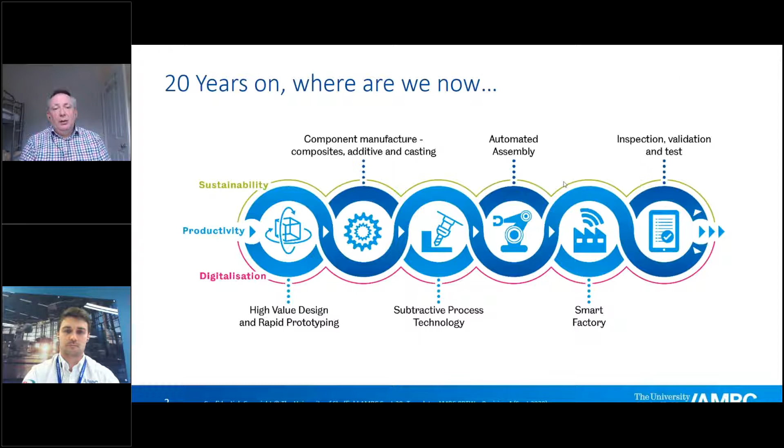Now, if we move on to the next slide, then what we can actually see is that productivity is all about doing more with less. It's improving productivity by improving quality, removing rework, getting things right first time. And we do that through the adoption of digital technologies.

Yesterday, if you listened to Juergen Maier, the author and the leader of the Made Smarter program and the producer of the Made Smarter review in 2017, digitalization is here. You cannot ignore that. But if we embrace it, then we will really improve the productivity in the UK through the adoption of industrial digitalization technologies.

And if you'd come to the AMRC stand at MACH in 2018, you would have seen a number of those IDTs. You would have seen additive manufacturing components. You would have seen augmented reality and virtual reality, the use of machine learning and artificial intelligence to improve the decision-making of the manufacturing process.

And all of these technologies are really driving the sustainability agenda. Digitalization is an enabler to improve productivity and to improve sustainability. But sustainability isn't just about being green. There's a huge drive towards net zero and environmental sustainability, but there are other aspects of sustainability as well.

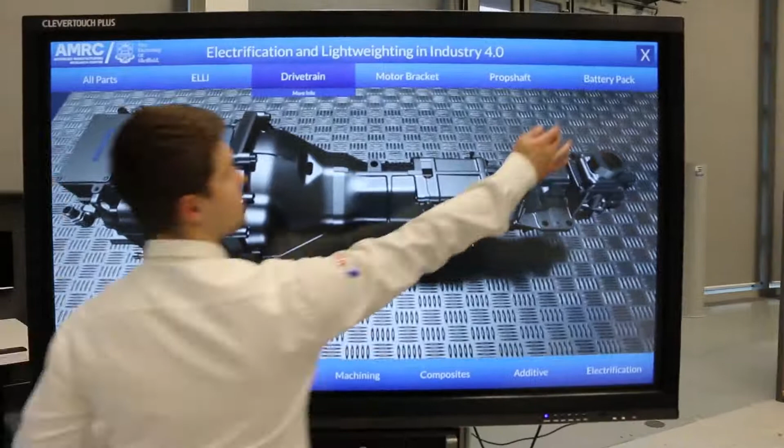So each demonstration I'm going to walk you through today isn't intrinsically linked to each other. However, they are interlinked via the main central product, which in this case is Project ELLI, and the digital twin. Now, the benefit to using a digital twin in this sort of setup and scenario is it allows us to process monitor each of those demonstrations and the individual bits of information that are coming out of them.

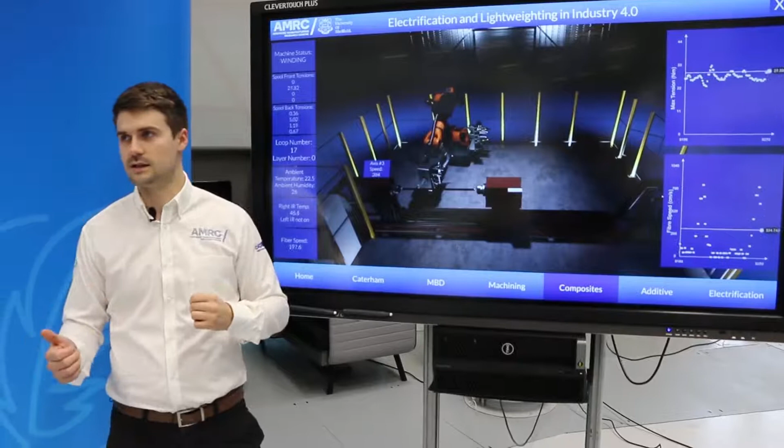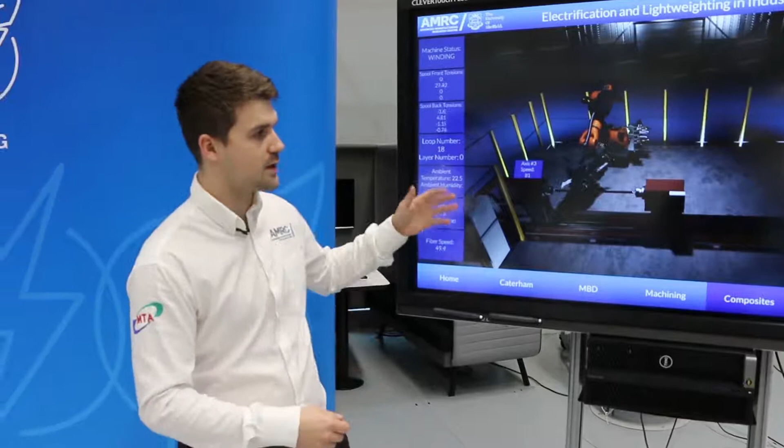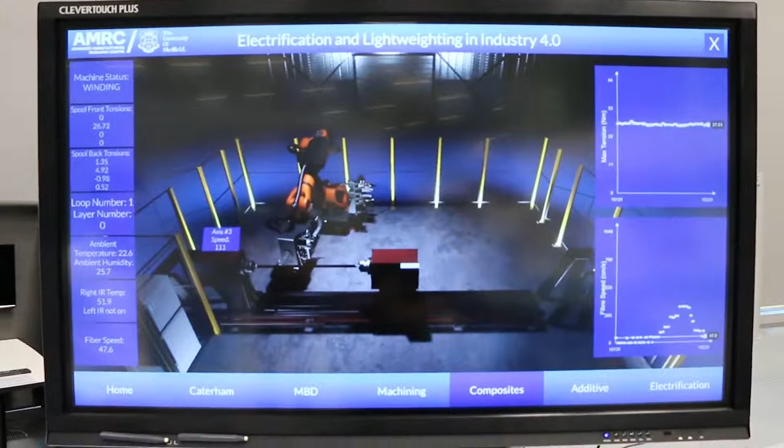So for instance, on the composites demonstration that we've got, this is the robotic filament winder, which is sat over in our Advanced Composites Centre. I can't show you that in physical form today because it's too large for us to actually have here. But this is effectively mirroring what is happening back in that facility. By capturing the data of the filament wind - the tension, the angle, and the speed of the fibre winding - it allows us to understand how well that process is being performed. It allows us to learn from that data, and by learning from that data, we are then able to implement strategies to improve the manufacturing processes that we've got.

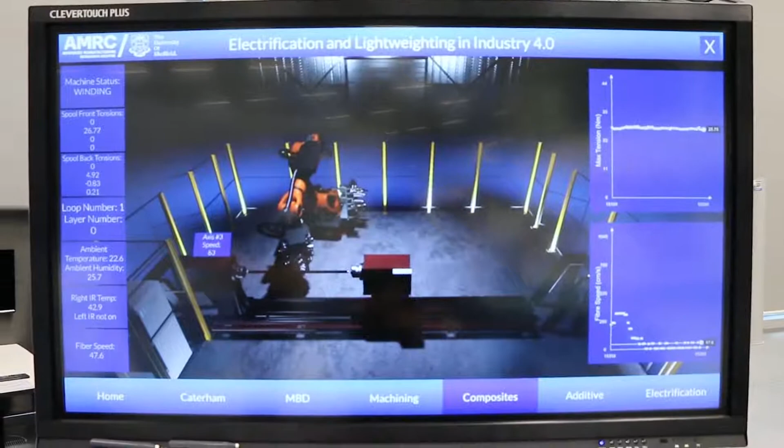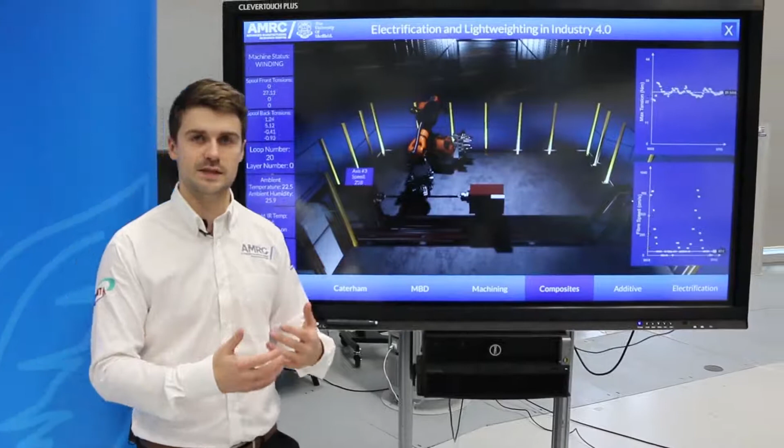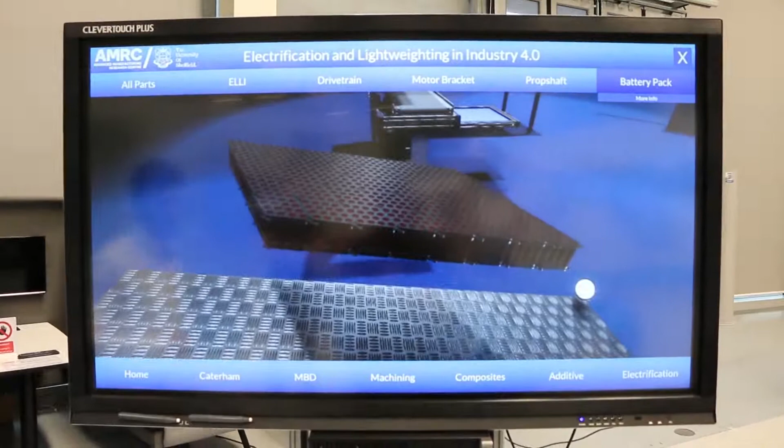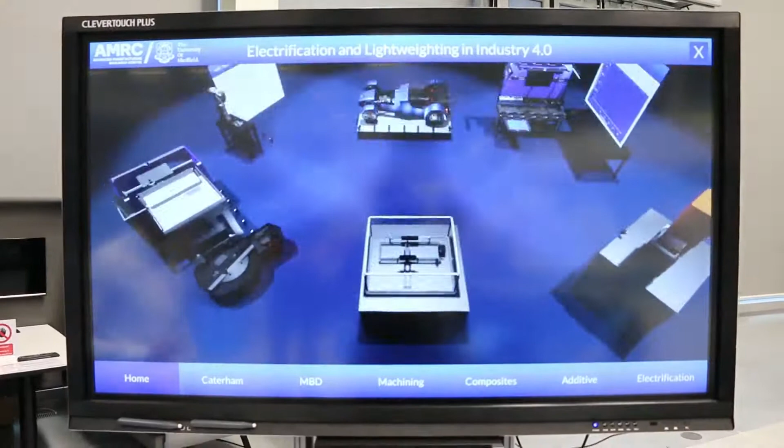By improving those manufacturing processes that we've got, we want to lean back into the sustainability piece for Project ELLI, which is what we're all focusing on here. Following up these Industry 4 technologies and using that process data to improve the way we work allows us to hone down on the best manufacturing processes for each product we output. In the case of ELLI, where we've been working on a carbon fibre wound shaft, we're able to improve the process speed, improve the process quality, and reduce the carbon offset of that process through a reduction in the amount of time it takes to perform.

To follow on from that sustainability aspect, we've got other aspects of digital information being fed through. For example, on the MBD demonstration, which I'll show you later, we're using that to track and monitor the measurement profiles on the robotic program as it runs through its inspection process. Using that inspection process data, we're able to monitor how that inspection process is performing offline, which means that as effectively a maintenance team in this scenario, we can track and understand how each component that's been inspected is running through. We can then begin to see tracks and trends in the way we're running these operations, which allows us to improve on those processes again and hone down on where some of these defects may be.

I think the key thing to touch on is Industry 4 is an enabling tool. Having that level of process data allows us to look at aspects like machine learning and AI to improve these processes on the fly. We can go into digital twins at great depth, but I don't think it's worth spending a lot of time deep diving into the aspects of digital twin at this stage.

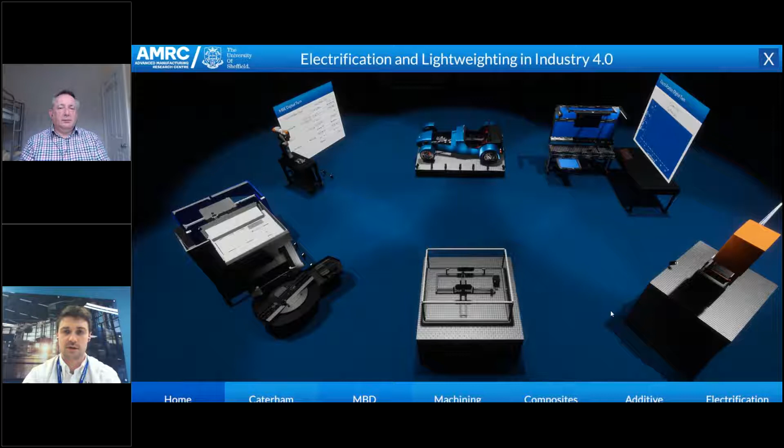However, it doesn't need to be as glossy and as visually representative as we see here. The key thing is understanding that process information coming out of the manufacturing processes and using it in the most effective way. So the first thing I'll take you through next is the electrification side of it. Here we're looking at an intelligent workbench assembly, and we're looking at battery pack assembly. So if we open up video 2.

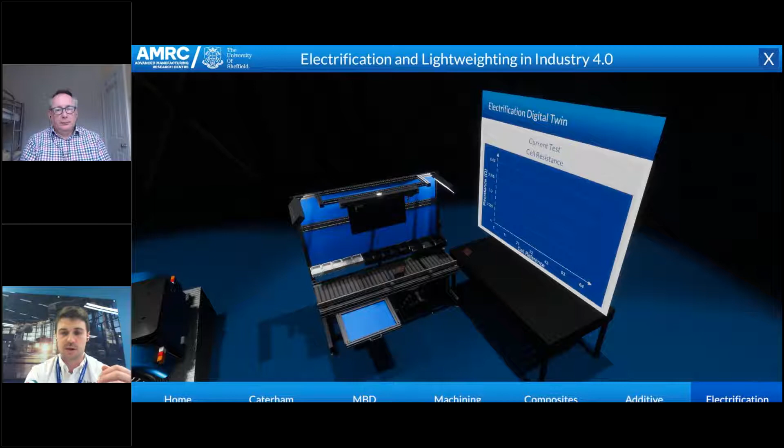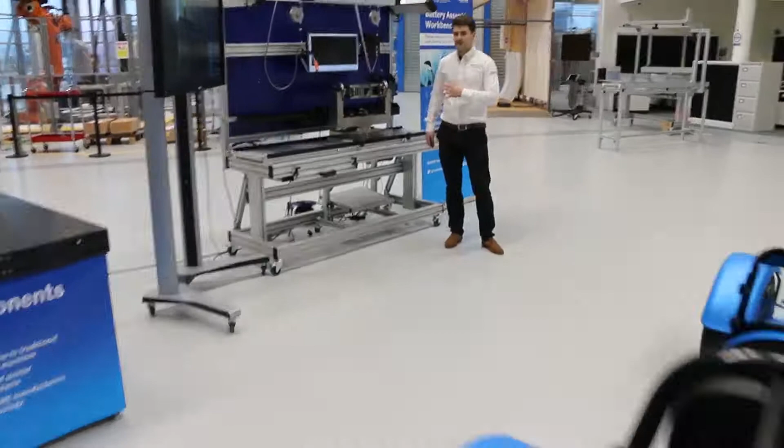So this is our intelligent battery assembly workbench. This was developed by our remote facility over in Preston. The engineers we have working in Preston are effectively a satellite site, an extension of the work we do here at Factory 2050. However, they have a distinct focus on battery cell and battery pack manufacture and assembly processes.

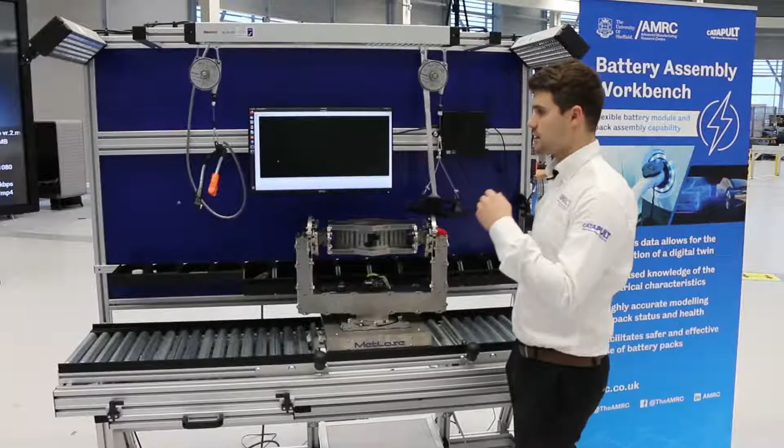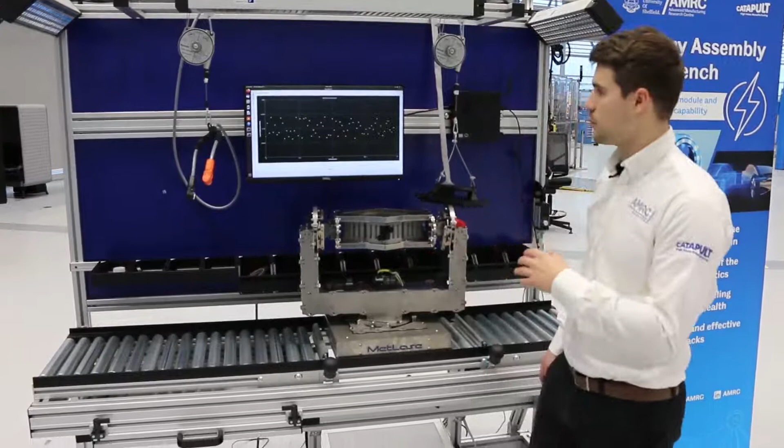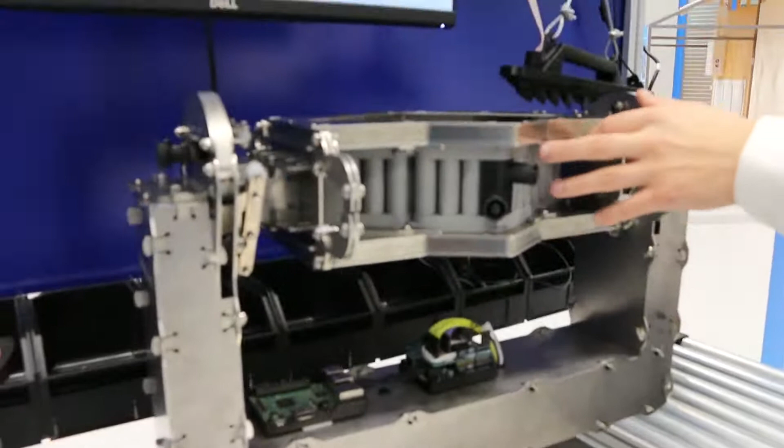The idea behind this workbench station is it offers us a digital passport for battery packs as they are assembled. The key thing when assembling battery packs is health and safety. The first thing to note when looking at this is it's a demonstration setup, so all of these battery cells we see here are dummy replicas. We didn't feel it would be safe to do this, not in a controlled laboratory environment, to have live lithium-ion cell batteries.

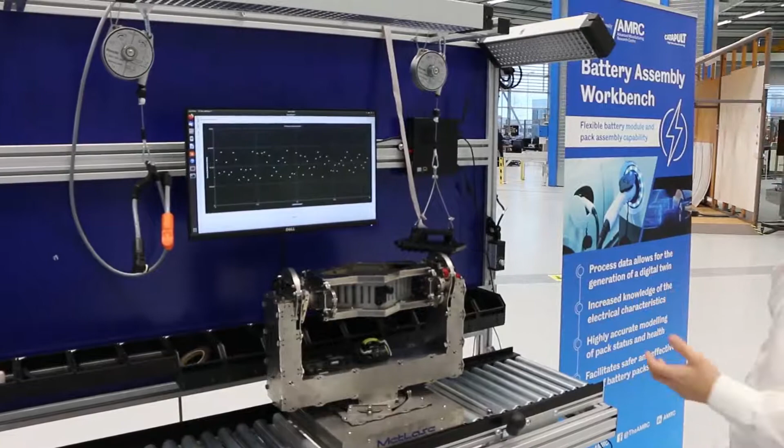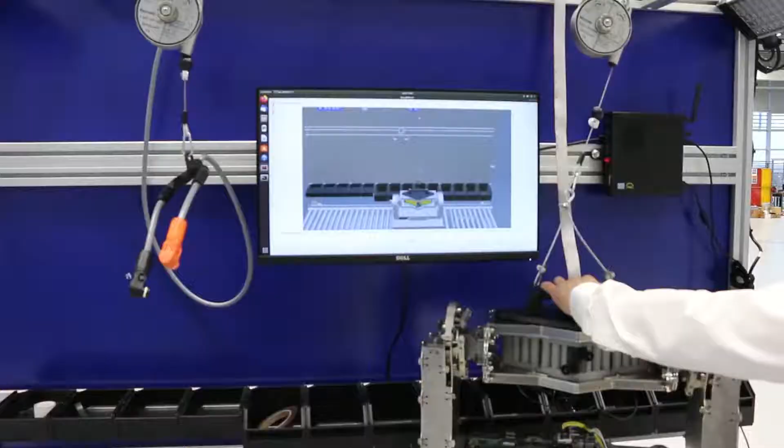One of the key things to note when building these battery packs is the measure of the charge between parallel poles. One of the key things to that is the monitoring and understanding of the power that each of these cells is producing and what that means as an entire pack. The workbench assembly we have set up here, and its identical sister in the facility over in Preston, is effectively a digital twin representation that guides an operator through the various steps of the processes. If we cycle through, the operator is guided through the various assembly processes and test procedures, allowing them to understand how the battery packs go together to form a module assembly at the end, and track the data as it's tested through.

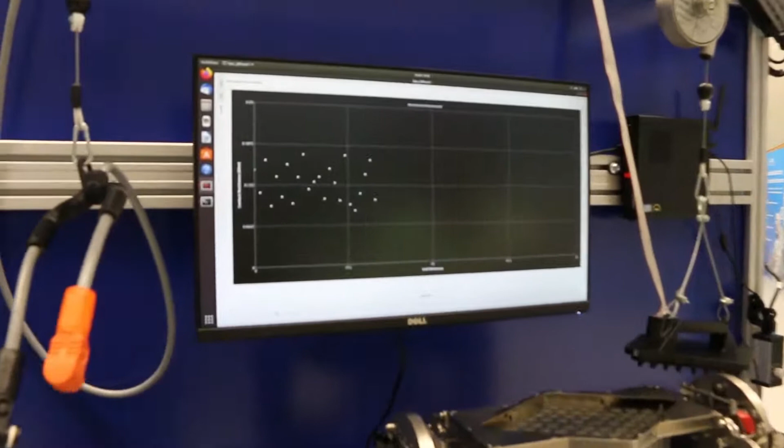For instance, we've got contact resistance across the board. The idea of what we're trying to hit here is 0.125 ohms over their entire polarity. That means we've got a consistent module, which means we shouldn't be experiencing any spikes. Now, where this ties back in is into our main digital twin, which I introduced you to earlier. That digital twin and the data we produce here are able to be interlinked, allowing us to track each of these packs as they go through, so that we're able to build up that trend of these modules being assembled over time.

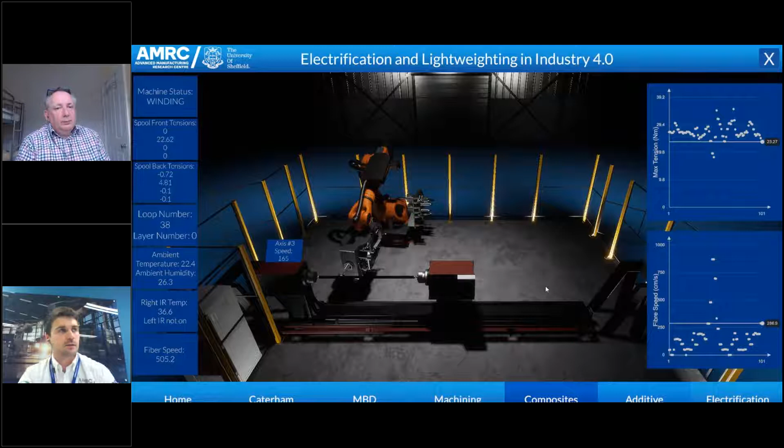Looking back at the electrification side of it, the key thing the guys in Northwest are working on is ensuring safety through assembly. One of the biggest problems we currently have in battery cell manufacturing is non-consistent components coming through. It's critical for battery packs to be assembled as consistently as possible. But we can touch on that later.

The next thing we want to look at is the lightweighting elements piece. We've got a couple of videos here covering composite winding and the additive manufacturing and machining processes. The first is the digital twin I showed you earlier of the composite filament winder. Next is the desktop X-Winder video.

This is our desktop X-Winder. It's a very low cost filament winding solution. What we're trying to show is that lightweighting and sustainability doesn't have to cost the earth.

Traditional filament winding machines and processes tend to cost hundreds of thousands of pounds, making it a very difficult market for most companies and SMEs throughout the UK to get into. That's why historic research and work on composite winding and lightweighting has normally only been applicable to tier 1s and OEMs. This is where we're looking to get it out into a much wider market.

One of the biggest technical challenges we face is ensuring that a lot of the kit is low cost enough and accessible to the majority of the UK manufacturing sector. The X-Winder does that.

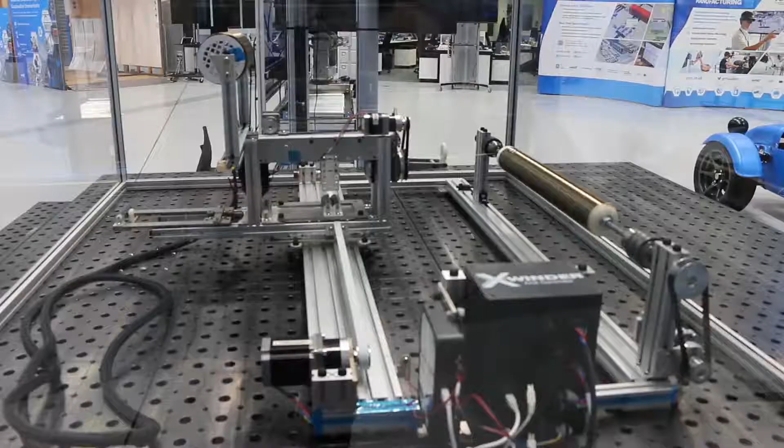This is an off-the-shelf kit. It costs about $3,000 and it's able to wind tubes that historically could only be done by very expensive bespoke machine tools. You can tell it's a bit low cost through some of the design artifacts on it - it's been made with aluminium profile solutions, a plastic mandrel, and some very low cost components. But the idea is it opens up a gateway for small and medium enterprises to get into this aspect of manufacturing.

Being able to manufacture lightweight carbon fibre components is something I personally view as critical for SMEs getting into the markets moving forward.

The great thing about this is it's set up using G-code, one of the first CNC programming codes, so almost anybody would be able to program and use it. It's very simple and straightforward. The idea is that historically, SMEs who would normally die away towards the end of industrial changes are able to keep going through the adoption of technologies like this.

Just to jump in there, I think the last two segments have really emphasized the sustainability agenda with the workbench. What we have the ability to do there is upskill people rapidly while maintaining quality, and through that we improve productivity and the traceability of components through the production cycle. If you listened to the presentation by Dave Holmes of BAE Systems yesterday, you'll see these technologies are starting to appear on shop floors.

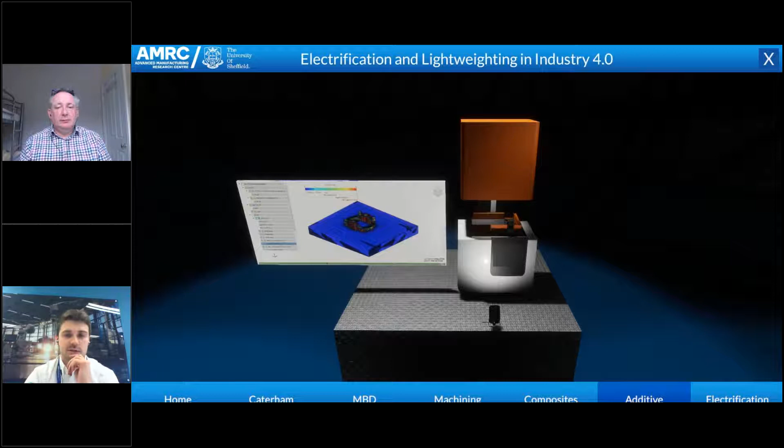This is the capture of the digital twin of the additive manufacturing, and I'm going to show you the next video, which will take us through some of the additive processes.

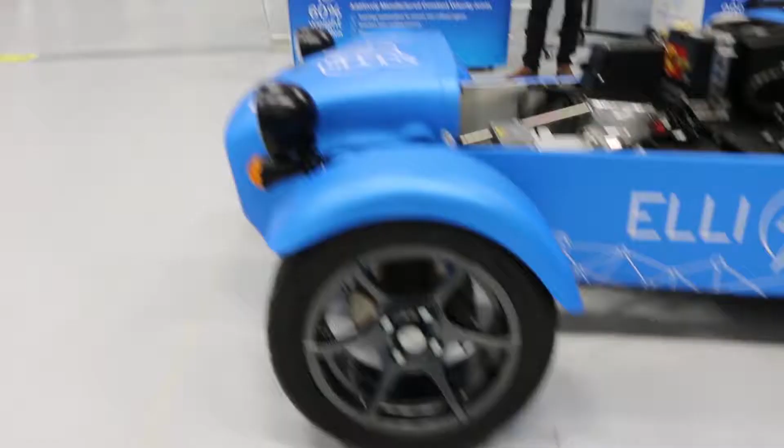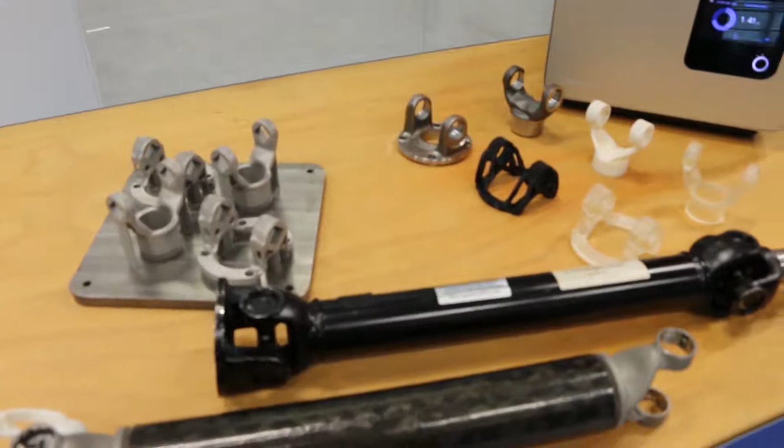Here we have our topology optimized additive manufactured components. As part of the lightweighting philosophy we've approached with ELLI, we've been looking at various routes through lightweighting of traditionally manufactured components.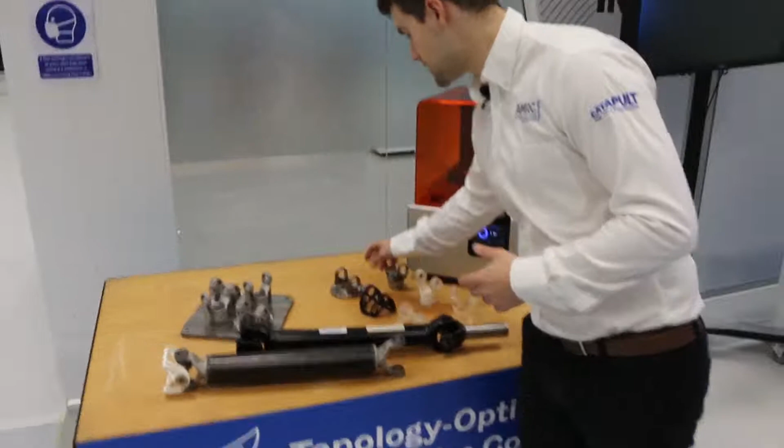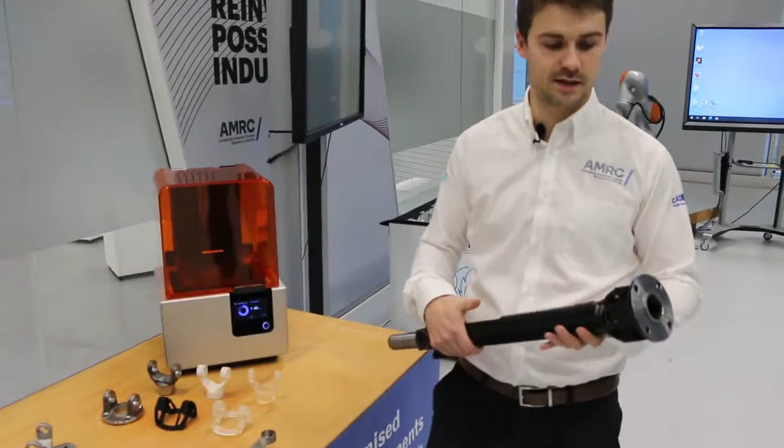Now, the idea of looking at these on an individual basis was we wanted to focus on the original prop shaft of ELLI. Now this, as a component off the Caterham, weighs 5.2 kilograms and is steel, welded to cast and machined yoke components, and this is where we saw one of the biggest potential opportunities.

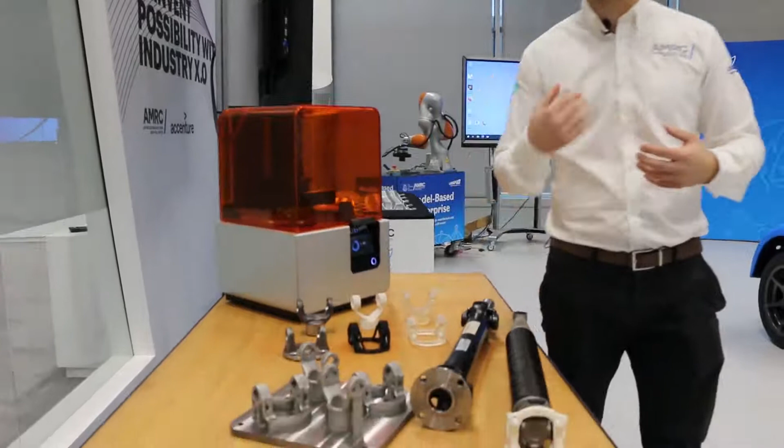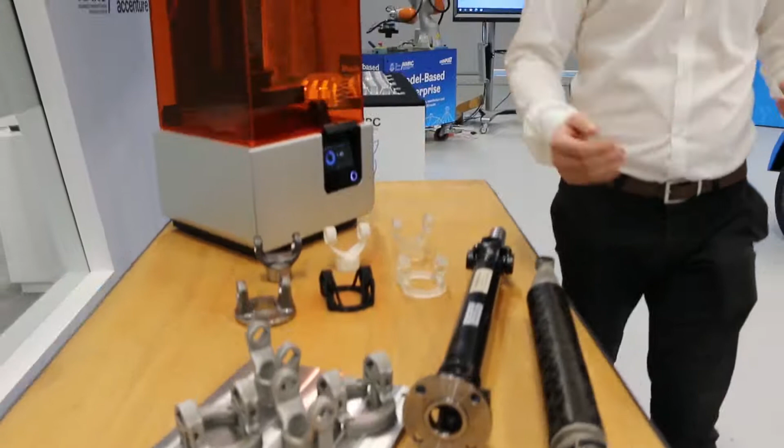This is an inertial component, which means it's a rotating mass on the vehicle. Now, to my mind, on an engineering level, when I want to talk about mass reduction, if I can get mass reduction on an inertia component, I can save much more overall in terms of efficiency than I could do normally through just lightweighting in general. And that's where we've come down this route.

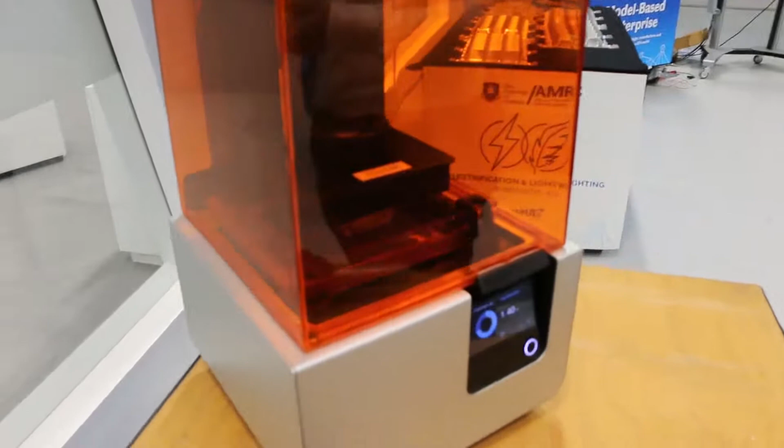So as a sort of philosophy, additive manufacturing tends to start with polymer. So what you can see on the Formlabs 3D printer behind me is effectively 3D printing these components. The idea behind using 3D printing polymer is it allows us to prototype components before we proceed to full manufacture, which means we can effectively understand how these components are going to behave when they're printed, and how they're going to behave when they are being post-process machined.

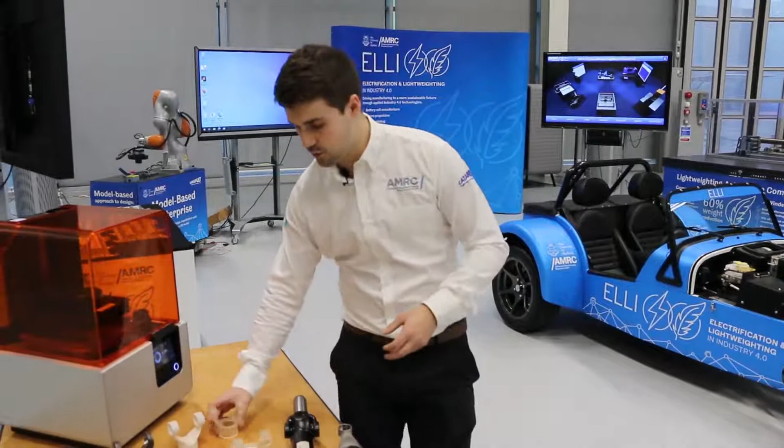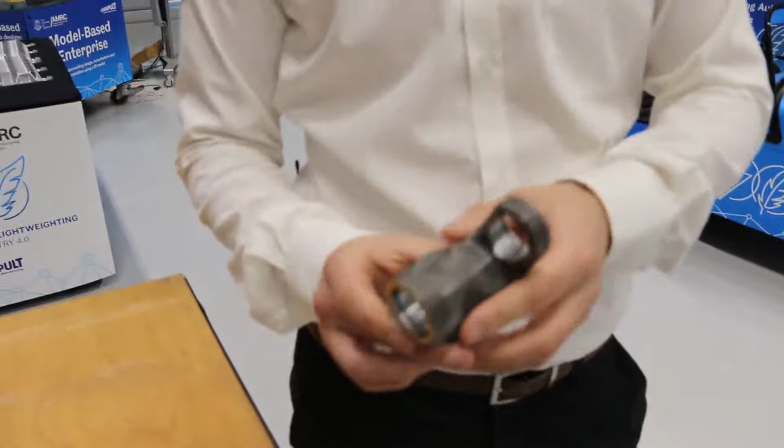But the real starting block with it is the traditional component. So we start with a cast component. This is machined to specification. We then run it through some generative design optimisation.

So here we're looking at printing in titanium as opposed to steel. This gives us a strength and weight benefit, because it means that we're able to reduce the amount of material that's in it. Now, getting that maximum material utilisation is one of the core aspects of sustainability for us.

Now, what we end up with are these titanium components that we can see here. The additive manufacturing process isn't in itself the most sustainable process in the world, and that's one of the key things we need to work on: how do we get sustainable manufacturing through the implementation of technology which at its core isn't actually that sustainable. We're trying to promote different aspects of sustainability within that.

So we've got our three core principles of economic sustainability, social sustainability and environmental sustainability. Through using processes like additive manufacturing, we can look to gain improvements on each of those in various ways.

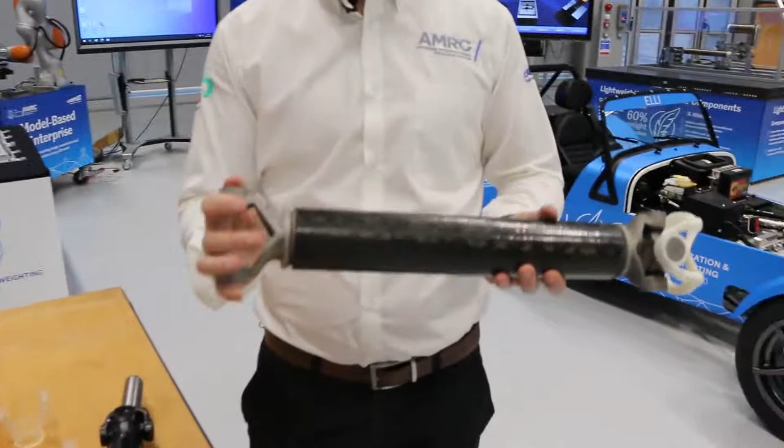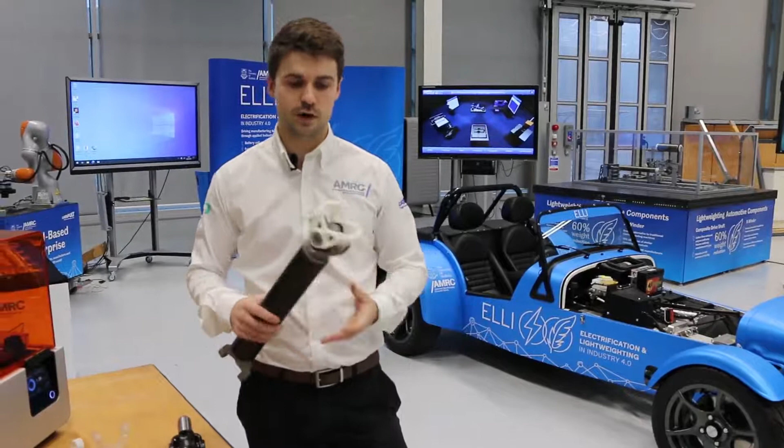Now, the outcome of that was the carbon fibre and topology optimised prop shaft. This was effectively built by the additive manufacturing team and the composite filament winding team, which I showed you, so on the low-cost filament winder. What we end up with is a component that has a total mass of 1.7 kilograms at the end, and that's around a 60% total mass saving.

But to go back to what I mentioned at the start, if we've got that on an inertial component, what we're actually saying is we require 60% less energy to spin that component through the driveline.

Now, if we're talking about going into electric machines manufacturing, the key thing that stops an electric machine being 100% efficient is the mass of the driveline components that it has to spin. So the lighter we can get these, the more efficient we can have a motor.

Then through implementing these technologies in manufacturing processes, we can hope to improve the efficiency of those baseline manufacturing processes, which means that in the long run, if we can develop CNC machines which have these sorts of components internal to them - lightweight gear sets, lightweight rotating components - we can actually have a much more sustainable machining process. So traditional machining processes like these on a cast component, we would actually be able to improve the efficiency of this as a process overall.

I think the key thing to take away from that is it's about the application of the technology again. So when we talk about using additive manufacturing in other processes such as subtractive machining, what we're talking about is, can we look through the initial manufacture of those CNC machines to improve, say, the gear sets or the rotating components within that, so that we can effectively have a much more efficient overall machine, which can then in turn lead to a reduction in the cost and the energy usage that it requires to perform a traditional process.

So the next thing I'd like to have a look at is the machining processes. This is the digital twin of our Full Monty machine tool. You might have seen this or heard of it before. It's effectively a retrofitted Cincinnati H5 machine tool with a series of sensors on it.

This was a sort of showcase as to how we could break some of the barriers of Industry 4 going forward, with a more legacy machine that was as capable of running as a brand new machine tool would still be. And the video that we're going to show you is about some lightweight aerostructure components. So if we can look at the next video.

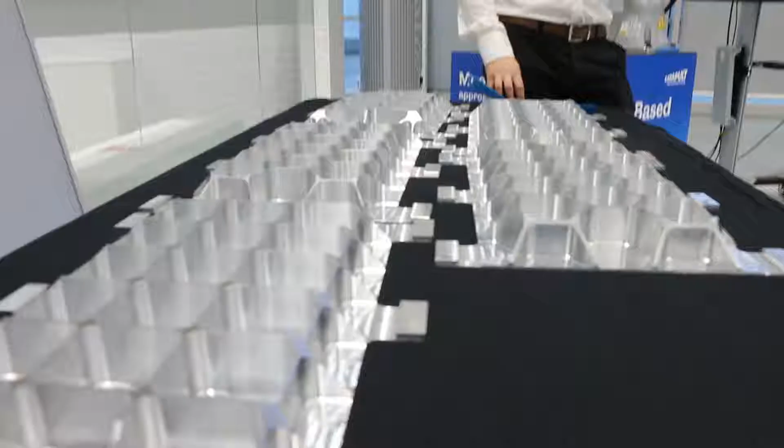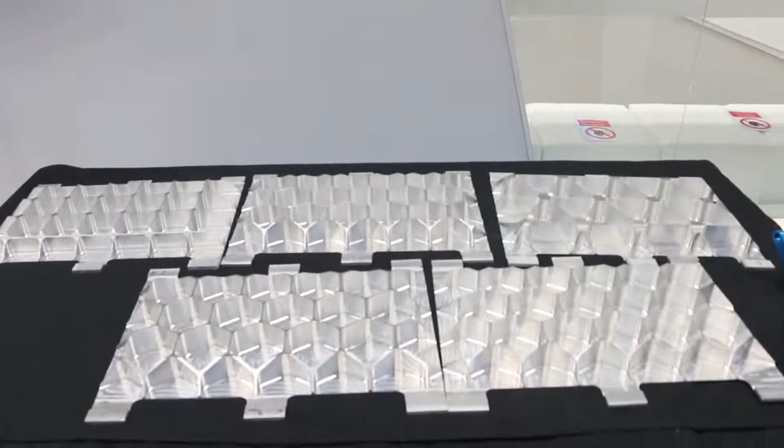This is our advanced lightweight machining demonstration, focused around aerostructures and nested pockets of machining process. Now, this is more of a machining strategy as opposed to something directly applicable to the main product, but it ties in massively to the lightweighting aspect.

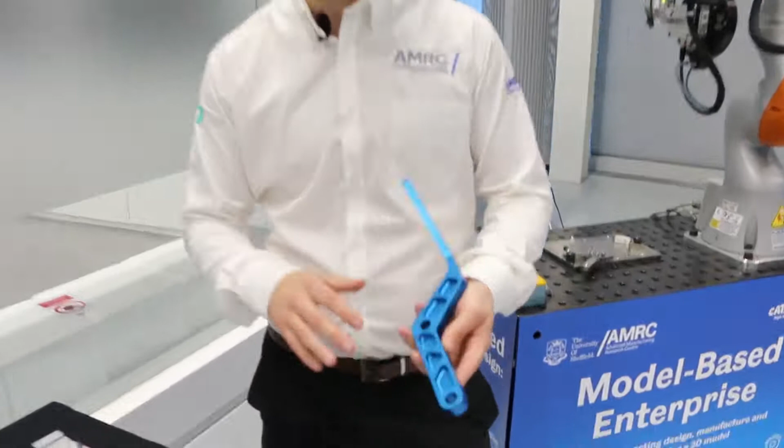We have attempted to apply some of the learnings from that on the motor bracket that we inspected on the model-based enterprise demonstration. However, we haven't been able to go as far as we were with the aerostructure components, which I'll give you more information about. That is in our long-term plan.

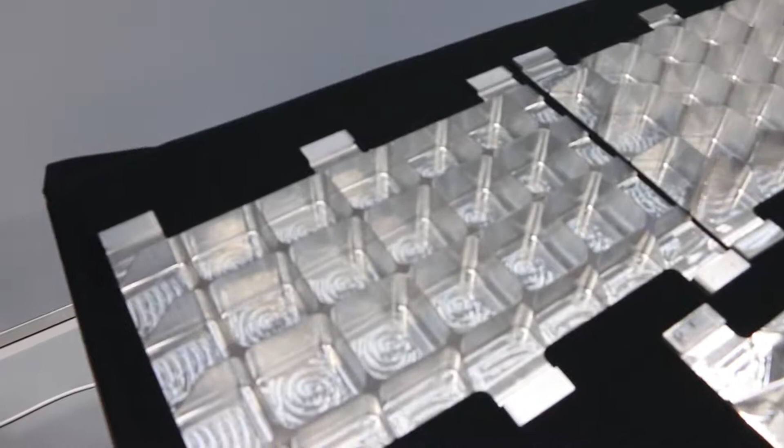So, the aerostructure components have focused on thin wall, lightweight machining of nested pocket structures. Where we've come around to this from is the traditional manufacturing method, which is to go for square pockets. The idea behind square pockets is that they are thought of as being one of the most lightweight components we could get, whilst also retaining the most structural rigidity.

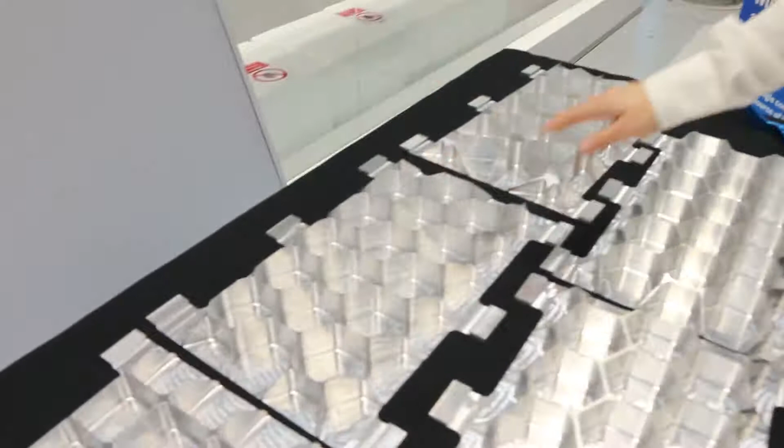Our technical lead in this, Dan Smith, felt that he was able to do more by investigating the nested pocket structures. So the three primary types we look at are square, hexagonal and triangular. I can't show you this, and it's really difficult to explain how much of a weight difference there is in picking these up, through camera.

But what I can tell you is that the overall weight saving between the squared structure and the hexagonal structure on a 2mm wall piece is 28%. Now, what that means in lightweight aerostructures is a gigantic saving in the CO2 emissions of a plane at current.

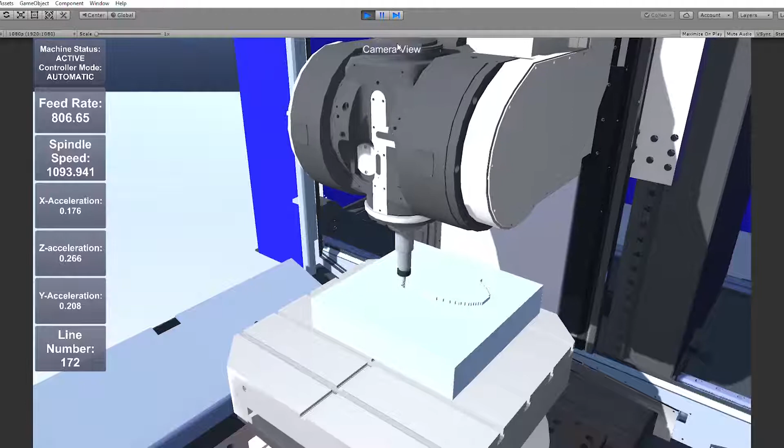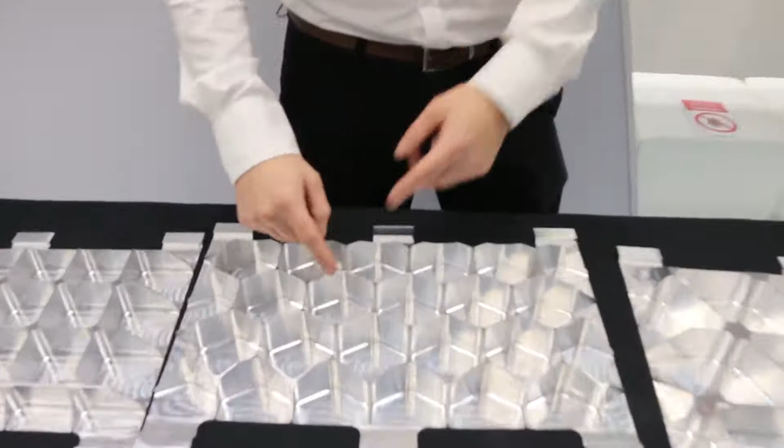But really, I think the most interesting thing about this was what we actually found while performing the machining operations. In performing the machining operation for the hexagonal component, because the tool path is actually a much more circular path, the degree angle here is 120 degrees, which means the tool has a much more gentle approach path as opposed to the 90-degree bends that you expect it to do.

That means the machine doesn't have to slow down as much while it's performing the operation, and it's able to actually perform this machining operation more accurately, faster, and produce lighter, better quality components out the back end of it. And that's been a real big win for us in terms of understanding how nested pocketed machining could be implemented going forward.

The two pieces that we see at the front here were really Dan's attempts to work out how thin we were able to go.

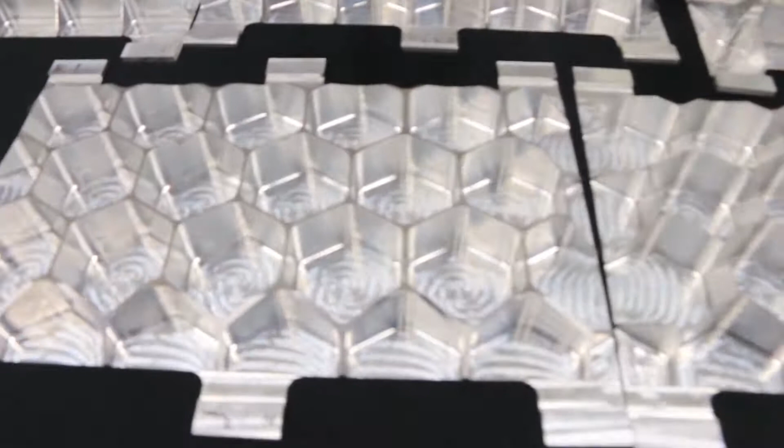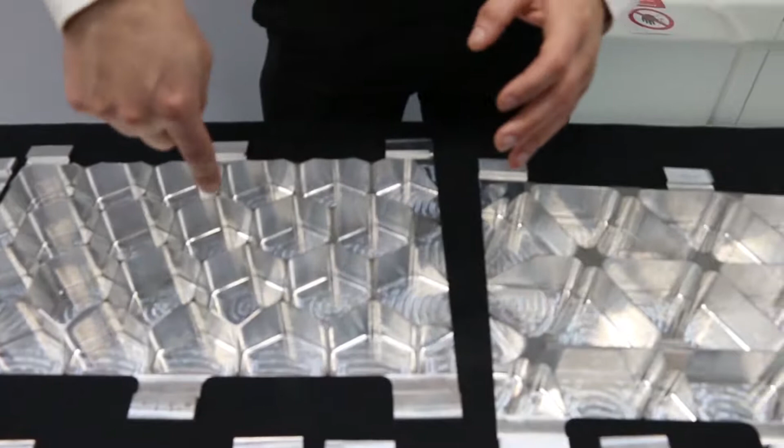One of the things we know when we look at these thin wall machines is because the straights on the hex are much shorter, we actually have a greater wall stiffness, which means that as the tool is performing its profile, we get less deflection on the component, which means we get a much more consistent wall thickness throughout the entire component.

In this case, that means we were able to get down to 1 millimetre of wall thickness consistently. That's something that when we tried with the triangular, we just ended up going straight through the wall, because the distance is so far that the flex on the wall is so much that the tool actually breaks through. So that's where we're seeing the biggest leap on this for now.

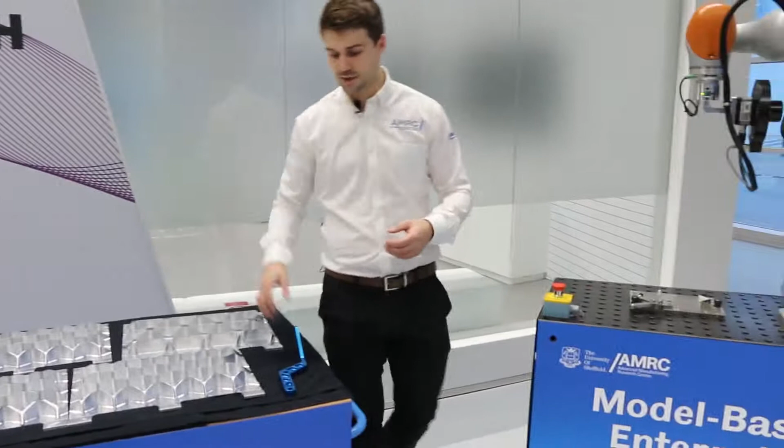But there is a lot more work to do on this going forward, and I think what we'd really like to do is implement this as a strategy going further into ELLI and looking at more components than just the motor mount, which we've done in this year's case.

So for me, what these last two presentations have really brought home is how you've got to look at the manufacturing process as a complete system. You cannot look at the individual components in isolation because they're all linked to each other. And it's that system view that really allows the drive towards sustainability, towards digitalization and productivity out the back end to really come through.

James? Yeah, definitely.

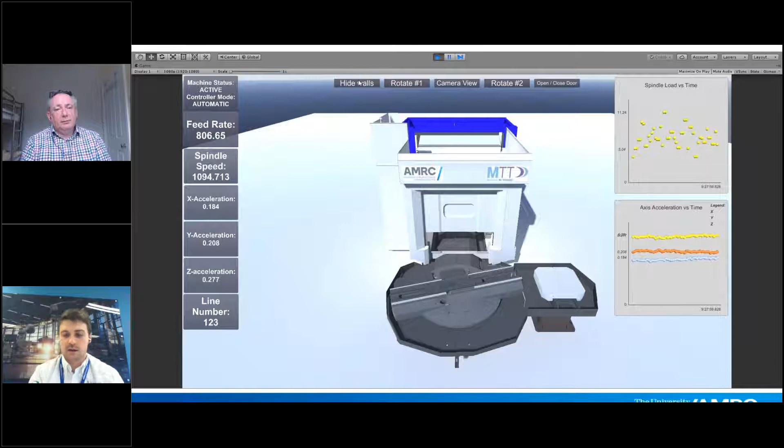It's about using these technologies in combination with each other to get to that end goal. You can't just focus on a single strategy or single methodology and hope that that will get you the majority of the way there.

So to move on from this and talk a little bit about how we tie in together, we want to look at Industry 4. The piece that we're going to show you here is model-based enterprise. This is more about quality management and ensuring that we have a single source of truth for components as they're running through their life cycle.

Now, I would personally view Industry 4 as that enabling technology, and that's what ties all of these individual technologies together in that final product, and that is how ultimately we get to the end goal of a sustainable future throughout environmental, economical and social aspects. So if we have a look at the final video.

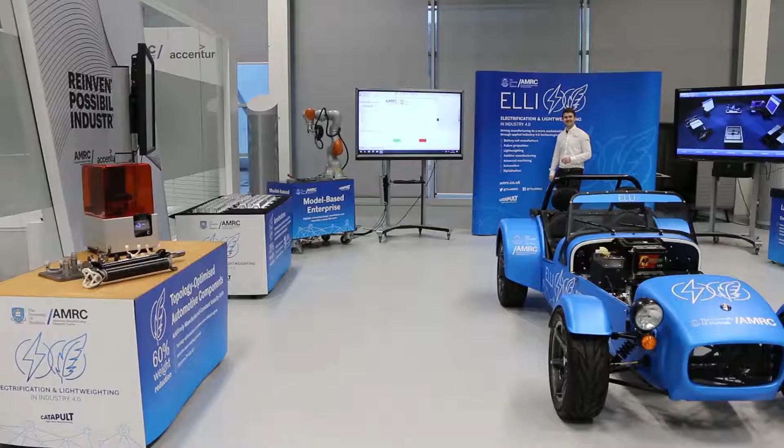So what we have here is our model-based enterprise demonstrator. Model-based enterprise is all about improving the single source of truth of information. It's about ensuring that we have the correct information in the correct place at the correct time. One of the problems we often find in manufacturing is that we have so many different quality management systems and different documents for effectively tracking a product or a part through its entire life cycle. Model-based enterprise aims to reduce that into a single source of truth.

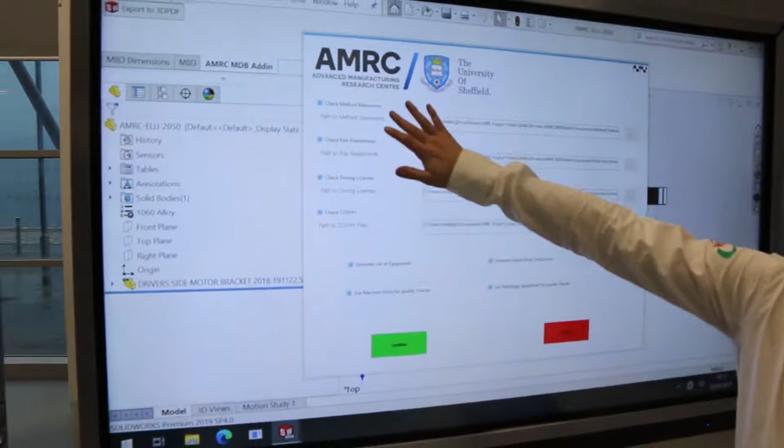So what we have here on the screen is our AMRC developed interpretation and application for that. As you can see, we've got method statements, risk assessments, driving licenses and COSHH for the individual component and its process. So what we have is effectively a setup with a 3D model in the background with all of the relevant geometric and dimensional tolerancing information that we need on that component, plus some of its associated risks detailed in the risk assessment and method statement for it.

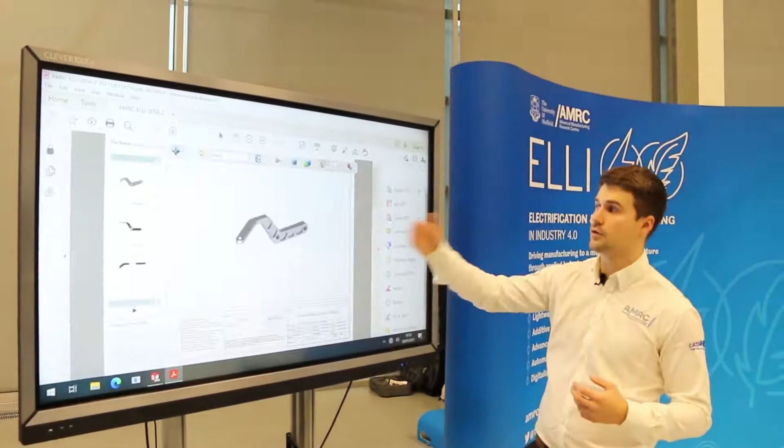So what we effectively generate using this plugin is a 3D PDF. While that's loading up, it effectively brings up that component into a 3D PDF. And what we then have from that 3D PDF is a model which we're able to move around in space. We're able to inspect the individual bits of information that are on that.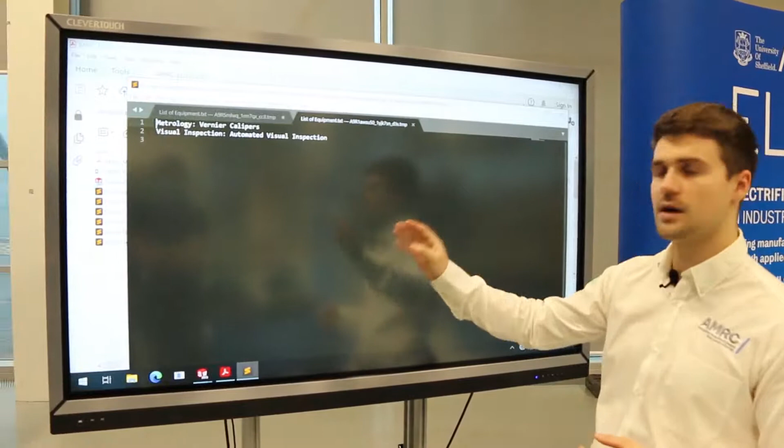So we can see here we have some measurement information, we have some tolerances for this as a process. Now what that does is gives you information as to how this inspection process should be carried out, what we would expect to see. What we have as an additional attachment to this is a list of equipment, attached to that single source of truth. It's within that model, being generated by the model as we go through and cycle it.

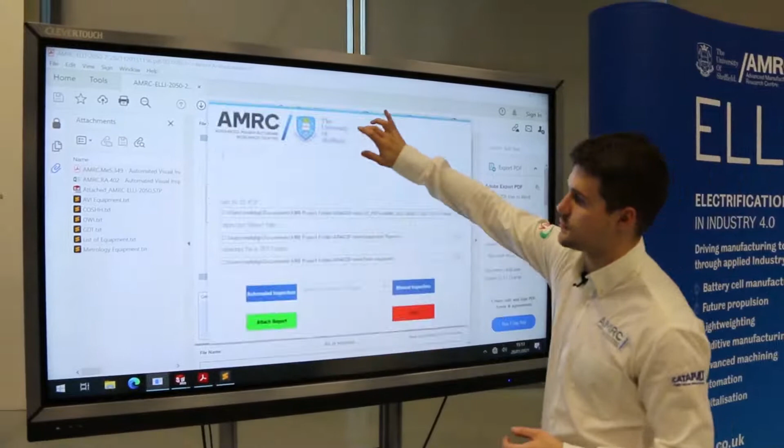So if we then go back onto here and click through our inspection process, this is where using an automated solution is enabling us to capture that information and data and then feed it back out into that 3D PDF, thereby creating a loop for that single source of truth.

So if we have a look through here, we've got pathways. What do we want to measure? I'm going to measure all components, all selections within that, and then we have a lightweight machine component which we've developed specifically for ELLI that we're going to inspect.

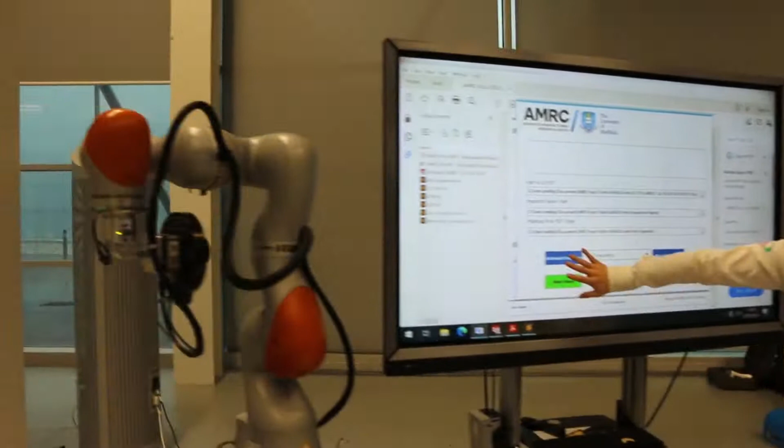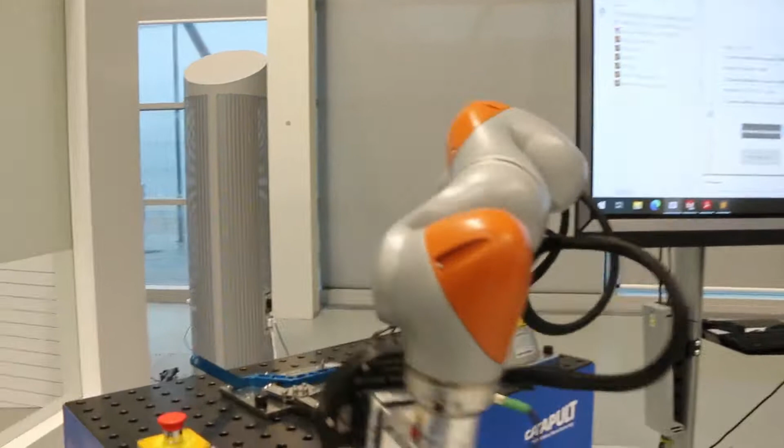So as we then cycle through that, the inspection process is effectively capturing that information while the operation is running. All of that information is then being fed instantaneously back into the model. So at the end of this, once it's generated the report, we will have the GD&T of that measured component.

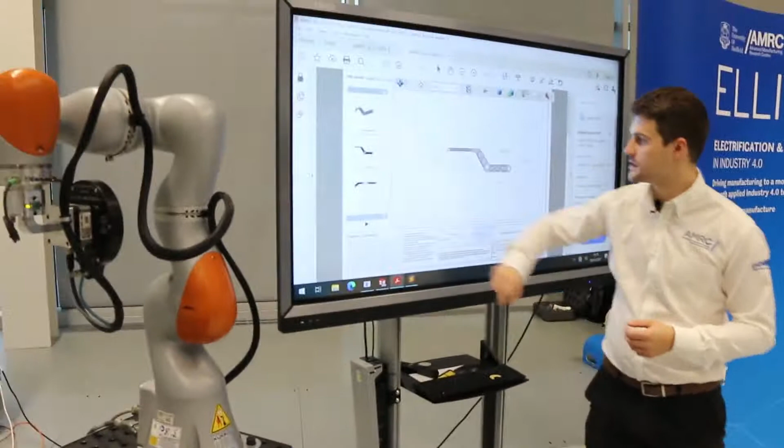So what we then have when we attach our report is a new 3D PDF with a series of information on it here, but the attachments are where we excel. So now you'll notice that we have captured images of it performing that inspection process. If we click onto that one, we can bring up a captured image of it taking a picture of that component.

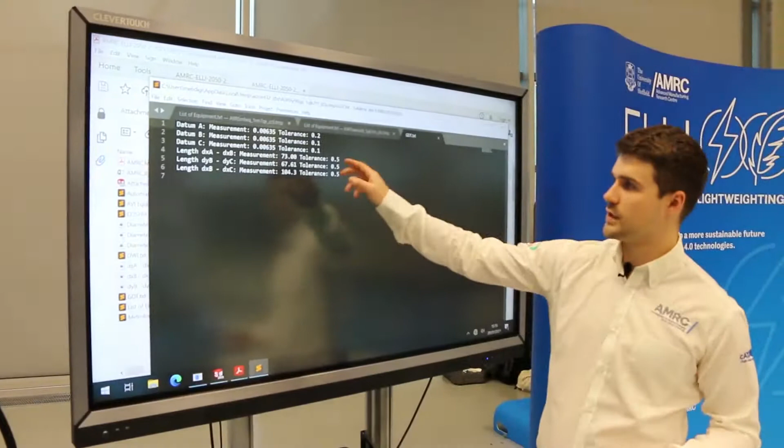If we go on to GDT, it actually brings up the measurement information and the tolerance that we wanted to see as it's running through that process.

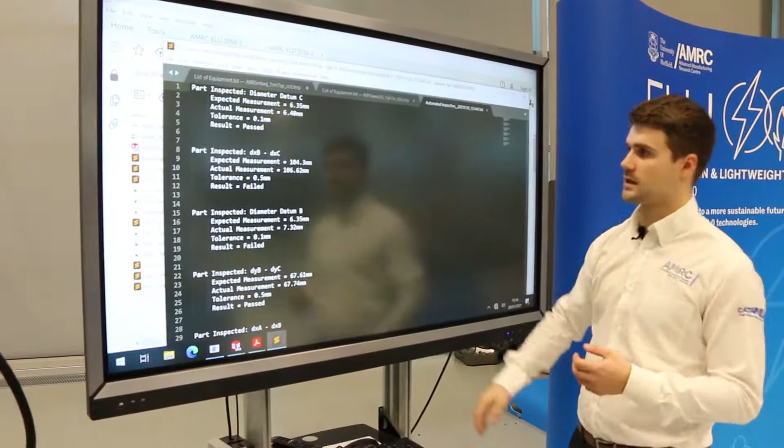And then the really important thing that we get out of this that really ties in that single source of truth is the inspection report, which is detailed here. So we have an automated inspection report which is directly measured from that component, and we can see that we've failed on a measurement here. So therefore we know that that component is out of spec and out of tolerance.

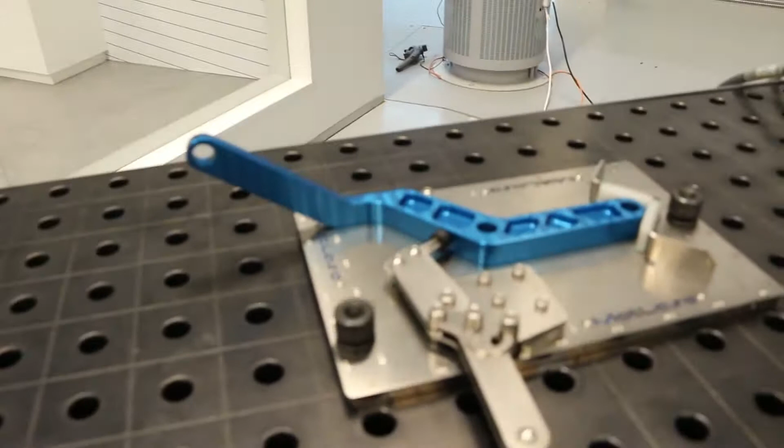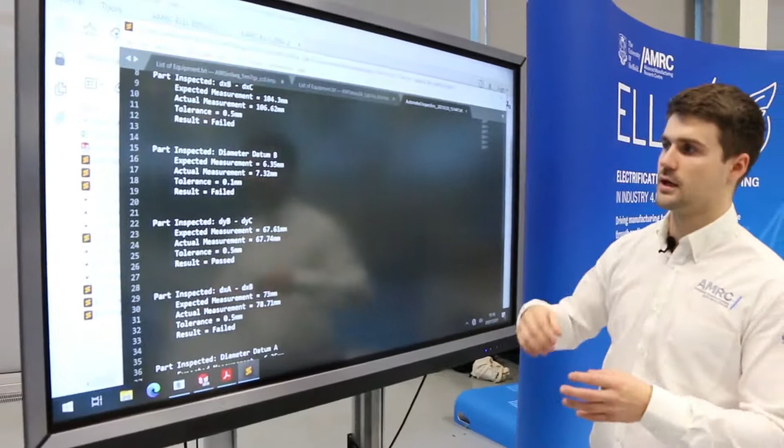Now all of these bits of information, we could then go back and edit within the actual part and model itself. So that's what I mean by containing all of that information within that single source of truth. It's all automated. It gives us that clamp down.

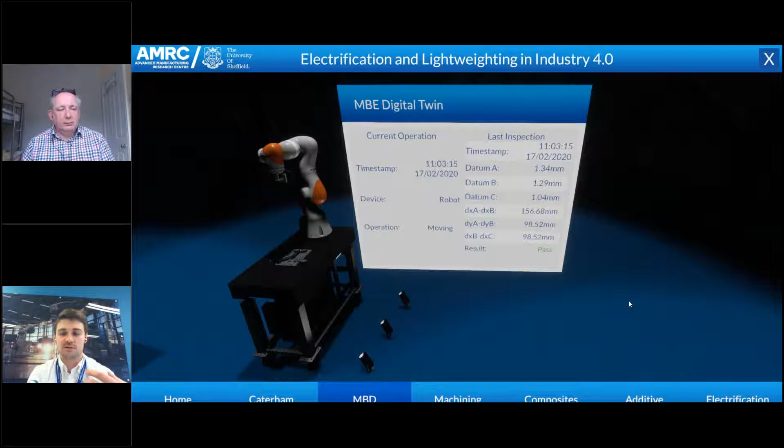I think the biggest thing to note with this automated inspection process and MBE is it's about improving the efficiency of our quality management systems and encapsulating information in a single source of truth. By having all that information, we're able to do away with a very large paper trail which plagues manufacturing. This is about ensuring we keep as much information in that single model as possible. If we can keep that through the life cycle of a component, think about sensors embedded into that component, we can use this to feed digital twins consistently throughout the life cycle of the component.

That brings us to an end of the individual technologies we've talked through today. The point I'd like to stress is we aren't finished yet. We're only just beginning on this development scale and the use of ELLI in sustainability in this way. We've got a roadmap over the next few years, but ultimately I don't think we'll ever see this finishing. It's going to be continual development, because if industry is always evolving, then ELLI will always be evolving alongside it. What you've seen today is a bit of a teaser looking towards 2022, and we're going to focus on some of these components going forward.

That brings us to the end of the presentation here. Rab, do you have anything more you'd like to add at this stage?

For me, we've got to think differently, and I think the last technology we showed, the model-based enterprise, the single source of truth, the digital thread that weaves its way through the life cycle of a product, a process, a component, really highlights what so much of Industry 4 is about. We want to remove non-value added activity, and quite a lot of the time inspection is of value, but the process of inspection is non-value added activity. The fact that we've automated it using relatively low cost solutions is critical.

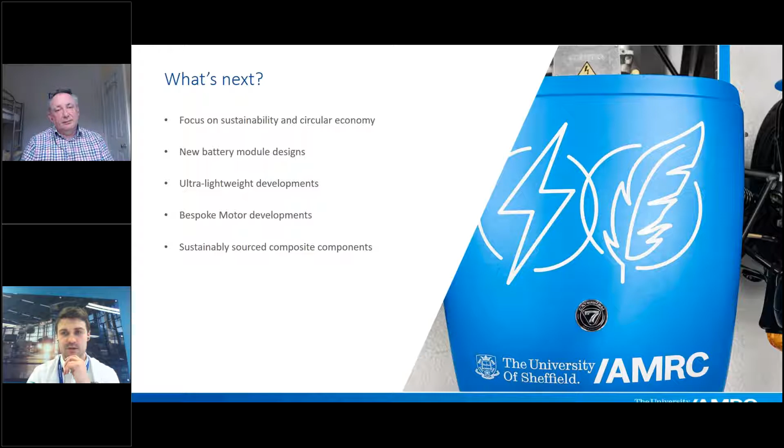I think we now hand back to James. Gents, thank you so much. That was really interesting, and I think really well put across for something that's made as a demonstrator and a live demonstration of technology. To actually try and convey that over this media is difficult, but I think you did a really good job. Thank you both so much.